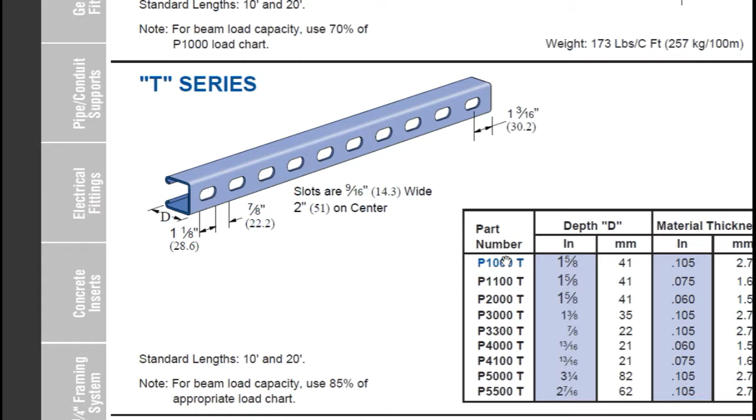This is Unistrut. That's a brand name. It's also called channel iron. I call this the Wiener hole channel iron. Here, this is the model you want to get. And here's the spring nuts. And for the 3/8 hardware, which you'll use, you get model P1008.

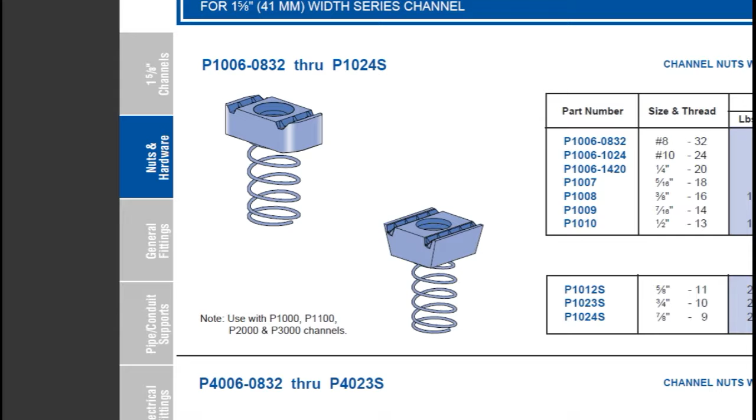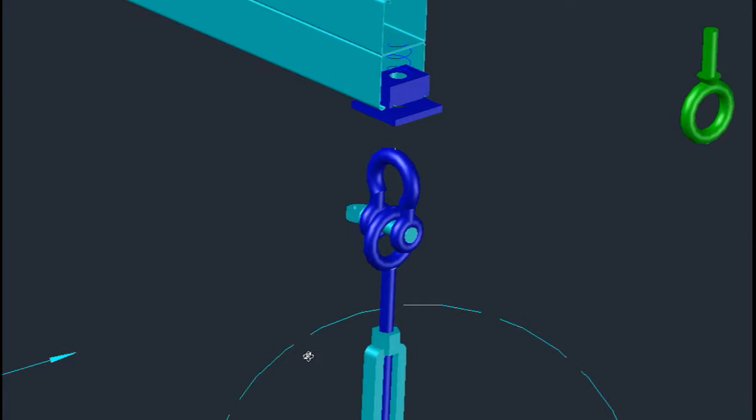Here's a 3D drawing that I did for flying some speakers, but I'm showing it here because it shows how the spring nut goes into the Unistrut. You'll also need the square washer. I didn't see it in the catalog provided in your folder, but when you go and buy Unistrut, ask for the square washers, the big, thick square washers for Unistrut, because you'll need them.

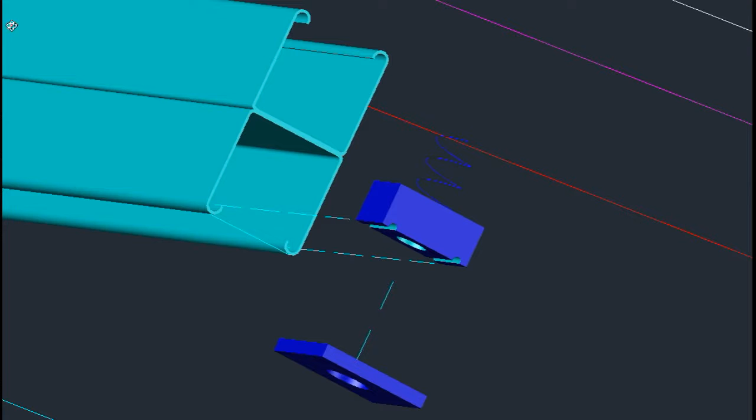And here's where the 3/8 bolt goes through the square washer into the spring nut. And you'll definitely want to use some lock washers and flat washers. Here's what you'll build with each piece. Each of these Unistrut pieces are 18 inches.

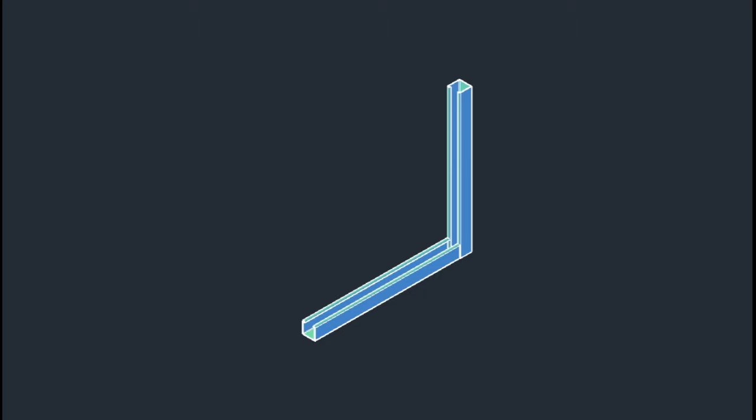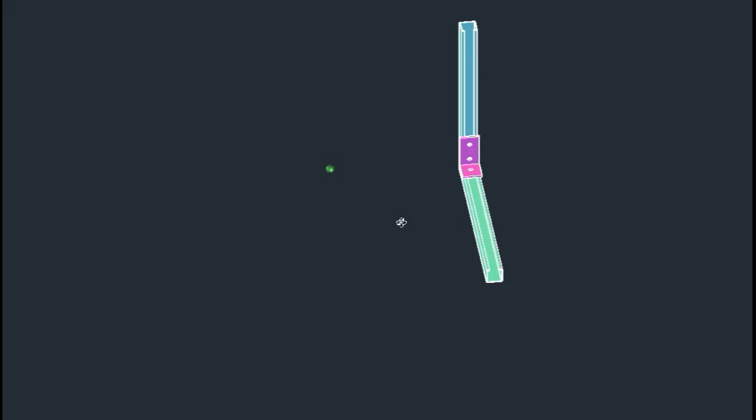Now here's what you'll use. It's a 3-hole Unistrut L bracket, and the side with the 2 holes will be positioned vertically. The L bracket part number is A1458.

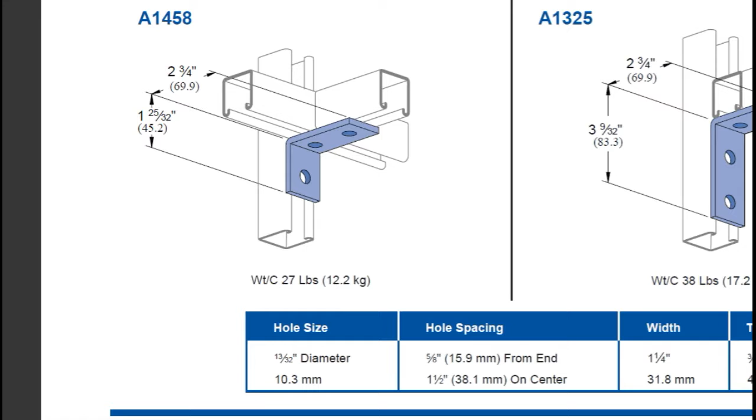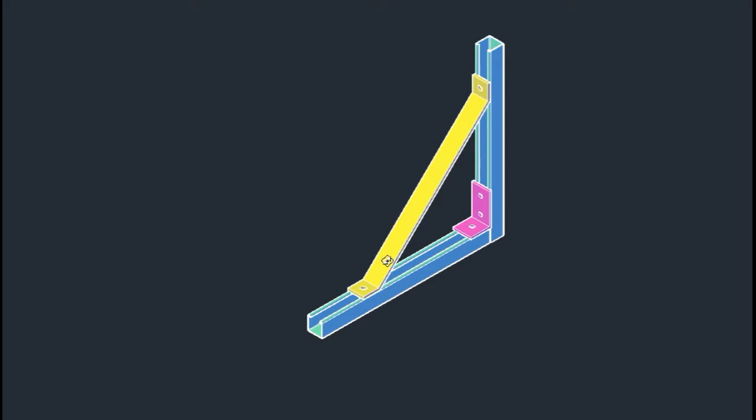Here's an angle brace. This is part number 2452. All this is in the catalog, everything except for the square washer. I don't know why it's not in the catalog. Unistrut, L bracket, and angle brace. You'll be building 6 of these.

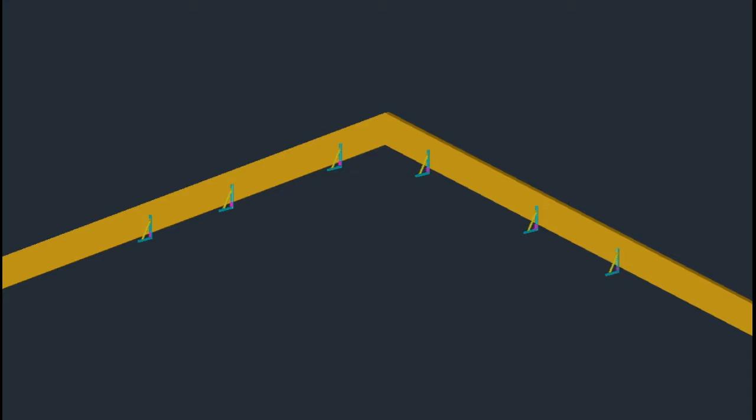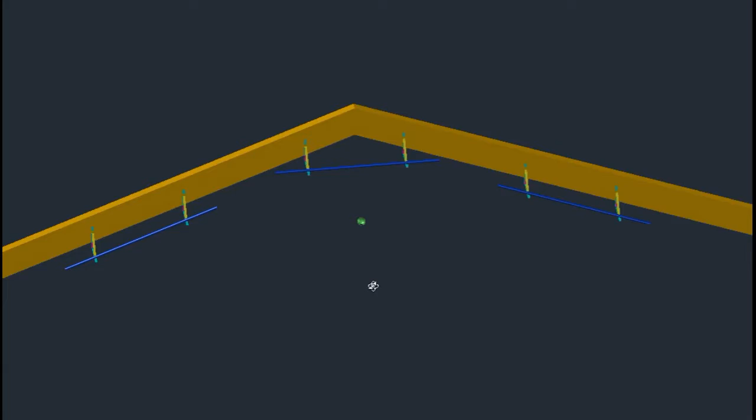Here's your worship center's glulam beams. So you'll use 2 big lag bolts for each mount to go into your glulam beams. This pipe is 2-inch heavy pipe, okay? 2 inches outer diameter. Each one is 10 feet long. And between the pair of brackets that hold these pipes is 6 feet of space.

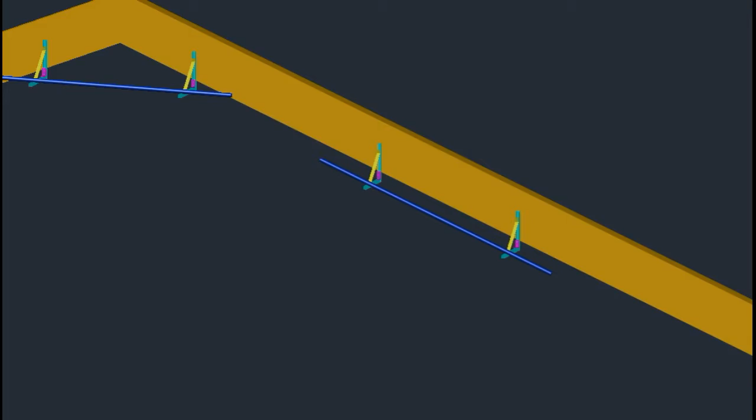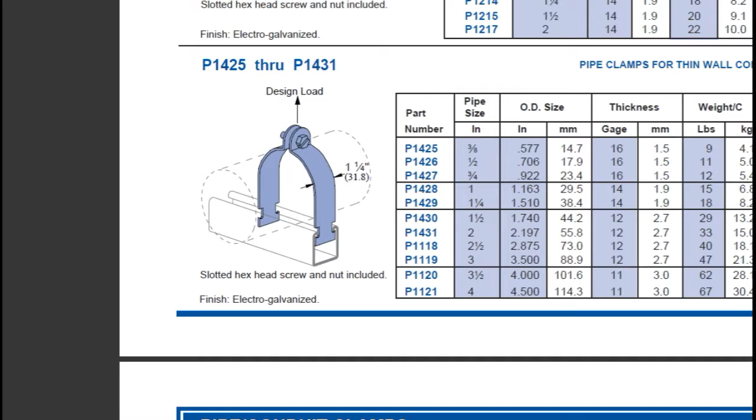I didn't draw this, but these are your pipe braces or pipe clamps that hold the pipe to the Unistrut. Now your slope is 22 degrees on this pipe. So you're going to have to make a brace.

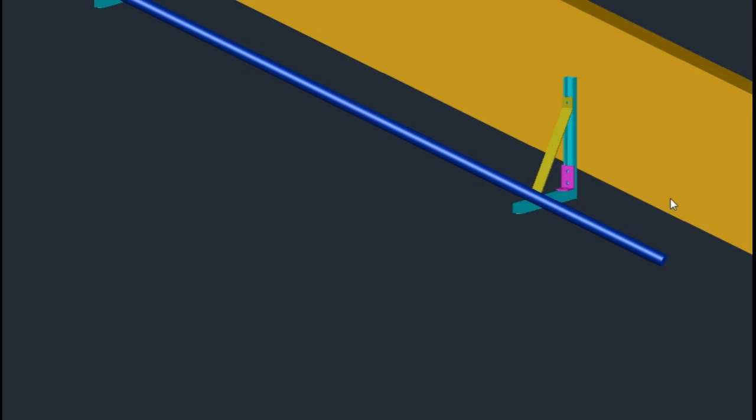You'll have to come up with something because it's going to want to swing downhill. It's going to want to make your pipe move downhill from the gravity. So I'm sure you'll think of something clever to keep it perpendicular to the big glulam beams. And the vertical Unistrut should go at least 13 inches into the beam.

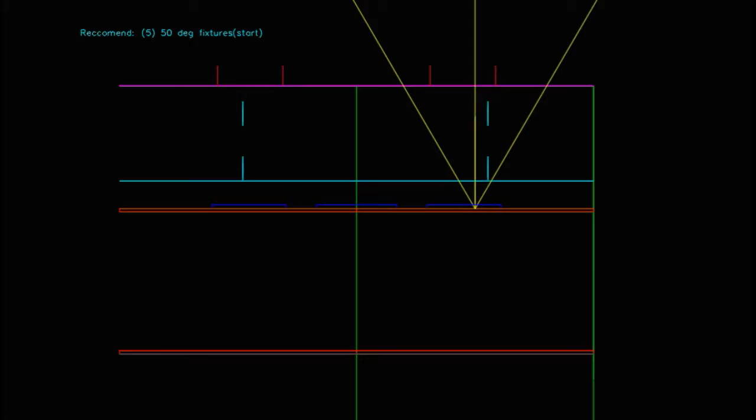Here's another 3D drawing of your room. It's hard to tell what it is right now. This is in the style of wireframe, so I just drew lines. Looking at the top view, the yellow lines are the beam of the lamp, and you'll want to put 2 light fixtures on each outer pipe and 1 lighting fixture on the center pipe to light up the center cross area on the wall.

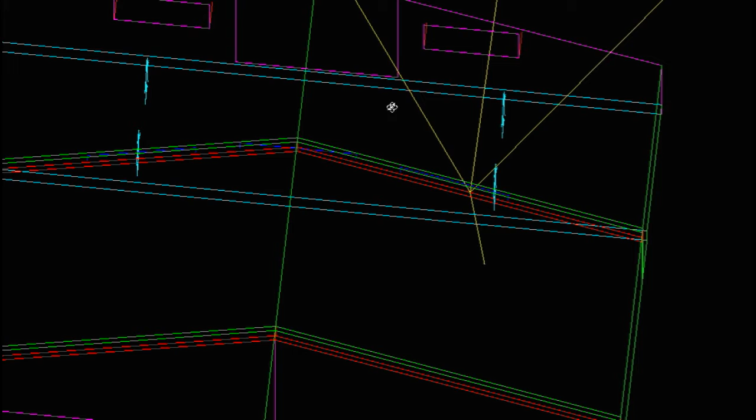Just make sure they're certified for rigging. You want to get the real deal. You don't want anything cheesy, because these lighting fixtures are heavy. You don't want it coming down, and really it can kill somebody. All right.